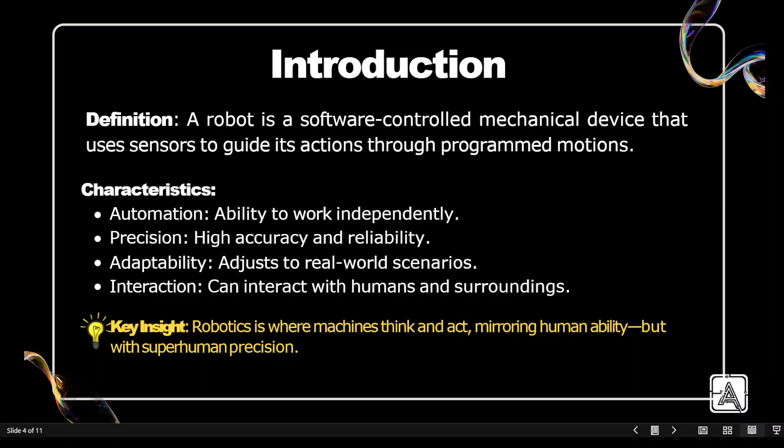Imagine this: a robotic arm on a factory assembling a product with zero errors, zero. A drone delivering medicines to remote areas. These are not dreams, they are applications of robotics showcasing its incredible potential.

Now, let's address a very critical aspect of robotics, the ethics behind it. Picture a world filled with machines smarter than humans, capable of learning and evolving. Without rules, it would be chaos, a scenario ripe for dystopian nightmares.

Recognizing this, Isaac Asimov proposed the laws of robotics, a set of principles designed to ensure harmony between humans and machines. These laws weren't made out of thin air, they arose from a pressing need to guide the behavior of intelligent robots. Let's explore them in detail.

A robot may not harm or injure a human being, or through inaction allow a human being to come to harm. This law ensures that robots prioritize human safety above all.

A robot must obey the orders given to it by human beings, except where such orders would conflict with the first law. This ensures that robots remain subservient but within ethical boundaries.

A robot must protect its own existence as long as such protection does not conflict with the first or the second law.

This enables self preservation while ensuring it doesn't come at the cost of human safety or obedience. These laws form the moral backbone of robotics, ensuring machines remain tools for progress rather than instruments of chaos. Imagine a robot nurse in a hospital prioritizing patient safety while following the doctor's orders. These scenarios highlight how Asimov's laws are not just theoretical, they are a practical necessity for guiding robotics behavior.

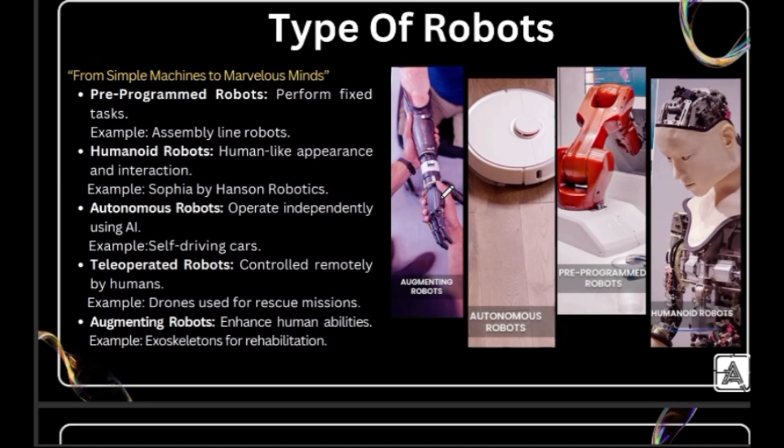Thank you. We have come to the second part of the video. In this part I am going to cover the types of robots, myths and facts related to robot kinematics of robotics, and the conclusion. From the ancient time when we designed mechanical robots to the current time when we have humanoid robots, we have evolved a lot.

Now robots are working as waiters in some restaurants. They are painting the walls. They can do all the small things which earlier only a human could do. In almost every field, we have robots.

Today I'm going to tell you about some main types of robots. First one is pre-programmed robots. Pre-programmed robots are programmed to perform a specific task. They can't perform all tasks, but they are expert in performing a single task repetitively. For example, assembly line robots.

They are designed to do a task repetitively. For example, in a factory, there are some machines to pick something from a place and keep it in another place, like this—it can pick a thing from here and place it somewhere here or there. Some machines are to pack a packet. Some machines are used for manufacturing. Those are known as pre-programmed robots.

Second one is humanoid robots. Humanoid robots, as the name suggests, have human-like appearance and interaction. For example, we all might have watched the movie Robot, in which Chitti is a humanoid robot. Humanoid robots can perform every task we actual humans can.

In real life, we have the example of Sophia. Sophia is the first humanoid robot. She has a human-like appearance and can perform all human tasks.

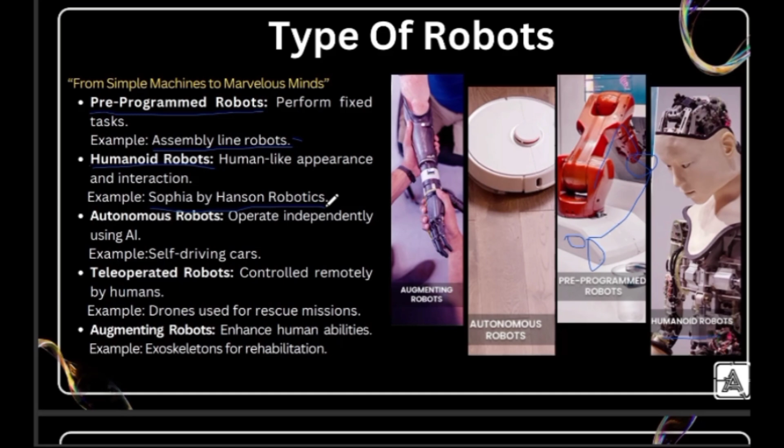Third one is autonomous robots. Autonomous robots are something which work independently without the interruption of a human. We just need to give them a command and they can perform the whole task without any help from us.

For example, a self-driving car or Alexa. We just need to give them a command. They will do the whole work.

Fourth one is teleoperated robots. As the name suggests, we have to operate them. For example, a remote control car or a drone. For a drone, we have to use a remote to move it up, down, or to stop it, to start it—so it is an example of a teleoperated robot.

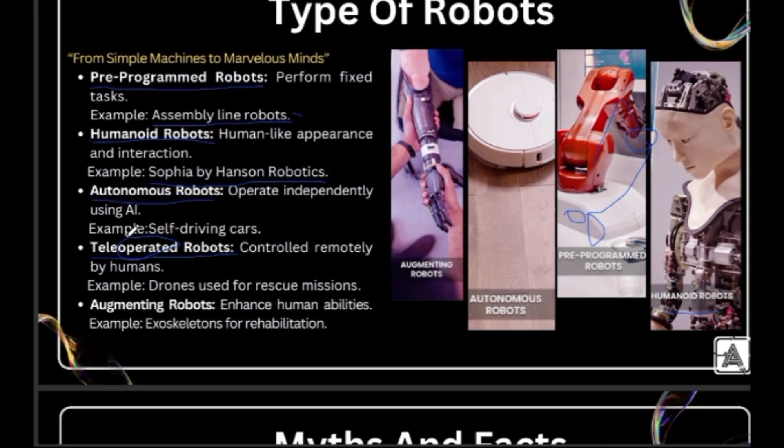Fifth one is augmenting robots. Augmenting robots are something which have the ability to perform a task like a human. For example, an exoskeleton—an exoskeleton is something which has human-like functionality, like an artificial hand or an artificial leg.

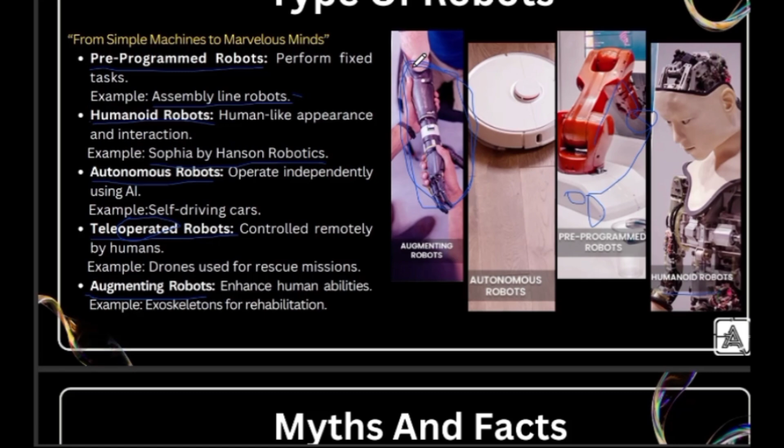Here you can see this hand can work like a human hand, for someone who lost his or her hand or in any case of an incident. So these robots are very helpful for us in performing some tough tasks.

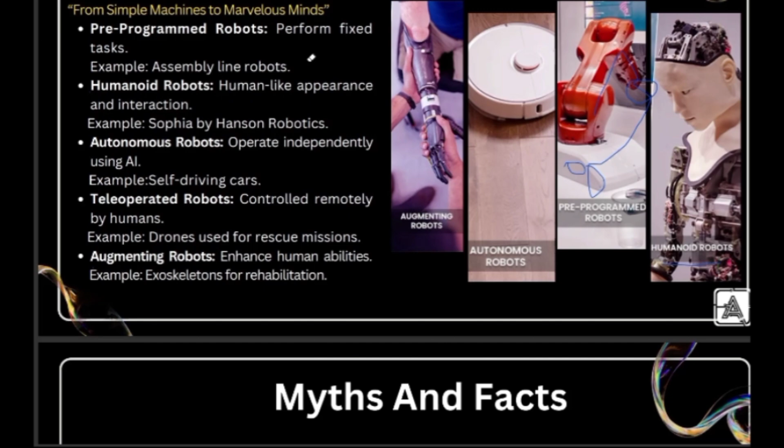And to enhance, to increase our productivity. So now let's move to the next part. In this part, I'm going to address some common misconceptions about robotics and provide factual insights to reshape our understanding.

Let's break it down. First myth: robots are here to eliminate jobs. It's a very common myth nowadays that robots are here to replace humans in almost every field, that they are eating the jobs. The actual fact is robots are here to help us, to create new opportunities by automating repetitive tasks. They can work as a helping hand for humans.

Nowadays, robots are getting replaced by cobots. Cobots are collaborative robots, designed to perform tasks for humans without hurting or harming them. So nowadays, robots are created to help instead of harming.

To support what I'm saying, I have some facts. For example, autonomous robots or autonomous cars still need a lot of improvement. They are far away from replacing a human being. We need robots in almost every field to make our work easy and efficient.

For example, in manufacturing or logistics, they rely on robots to survive. In a big factory, or somewhere we have to create a lot of production, we need robots to work instead of human beings.

Why? Because robots can perform work faster. They don't make mistakes as frequently, and they don't need breaks like a human being.

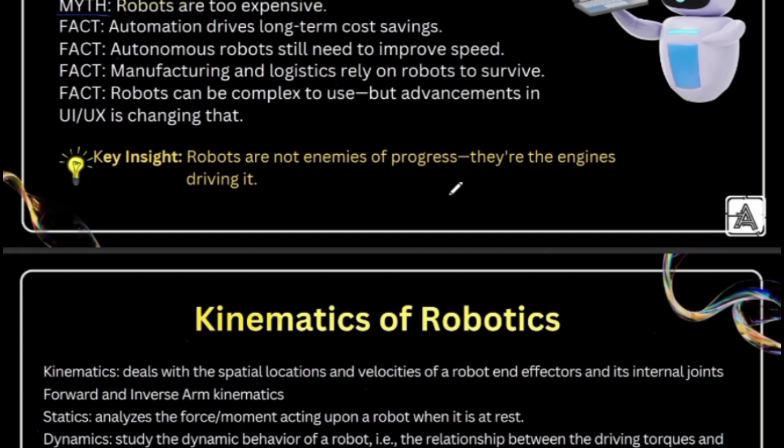Now let's move to the next part. Now we will study the kinematics of robotics. What is kinematics? Basically, kinematics is like giving direction to a robot's body.

Where does its hands or arm need to go? How fast should it move? What angle should its joint bend to reach the target? Without studying the kinematics of a robot, it is not possible to create a robot.

So, in order to create a robot, we should know all the kinematics, like the locations of hand and joints, the velocity of end effectors, and internal joints. If we know all these things, we can easily calculate other things.

For example, forward and inverse arm kinematics. In forward arm kinematics, if we know where the joint is - for example, let's consider this is a hand of a robot and this is a joint - then we can easily calculate that this hand can move here or here. So this is forward arm kinematics.

In inverse arm kinematics, it's just the opposite. If we know the place where we want to reach - for example, here is a glass, and we want to pick this glass - then, on the basis of the place we want to reach, we can calculate where the joint should be. So earlier we know the glass is there and we have to pick it.

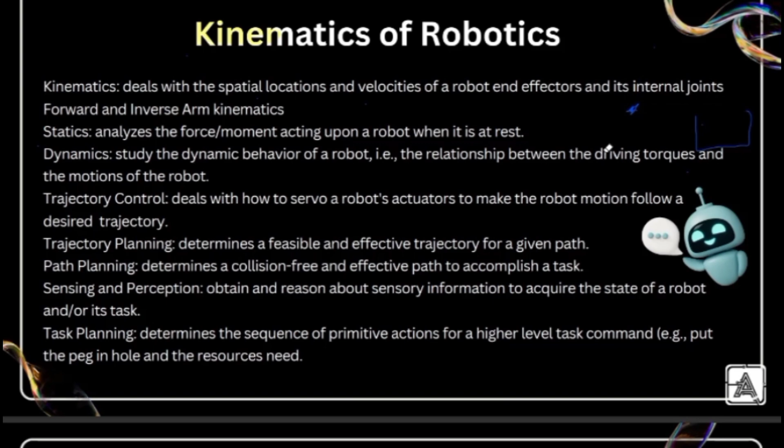So we can make a joint here by calculation and we'll pick this glass. This one is a part of inverse kinematics. These kinematics are very useful while designing the hands and legs of a robot to ensure proper working.

Next one is statics kinematics, which is basically the studying of force acting on a robot when it is at rest. For example, let us consider a robot keeping a box. To ensure that the robot does not drop this box or tip it over, we should ensure that force acting on the box from the side of the robot and force acting due to the weight of the box on the robot are balanced. If all the forces acting on this box and robot are balanced, then the robot can easily keep this box at rest. This is what the study of statics kinematics is.

Now next one is dynamics. In dynamics, we study about the driving force, motion, speed, and energy of a robot while moving. This ensures proper working of the robot in motion.

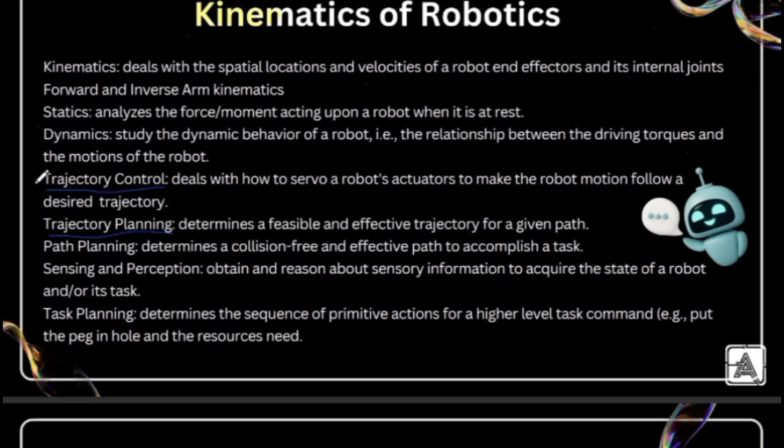Next one is trajectory control. Trajectory control ensures that the robot moves smoothly along a planned path. By trajectory planning, we earlier plan the path in which the robot should move, and trajectory control ensures this movement by using some actuators or motors. For example, if we want a robot to draw a straight line, it should not wobble. To ensure these things, we have to consider trajectory control and trajectory planning beforehand.

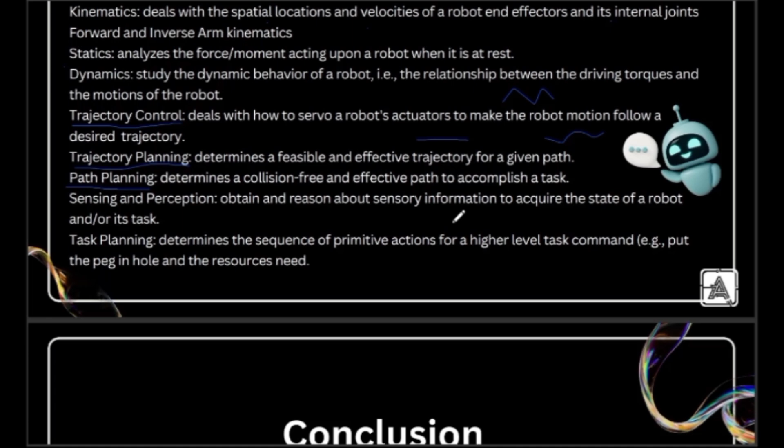Next one is path planning. Path planning is basically determining a collision-free and effective path to accomplish a task. Robots avoid obstacles while moving, but how can a robot sense where a hurdle is in the path, and how can we ensure a collision-free and effective path for a robot?

Here we will use some sensors. Sensing and perception is the process by which a robot can ensure a collision-free and effective path. Earlier, in the components of robotics, we studied about sensors. These sensors will sense the external environment. For example, in a self-driving car, if there is a dog in front of the car, these sensors can sense the presence of that dog, and perception devices take actions accordingly. This ensures a proper path for the car to move and reach the required location.

Then next one is task planning. Task planning is basically determining the actions to accomplish a higher command. Task planning is like creating a to-do list for the robot. It figures out the steps needed to complete a bigger task. For example, if a robot needs to assemble furniture, it should decide the steps like first attaching the legs, then seats, then cover, and so on. So this all comes under task planning.

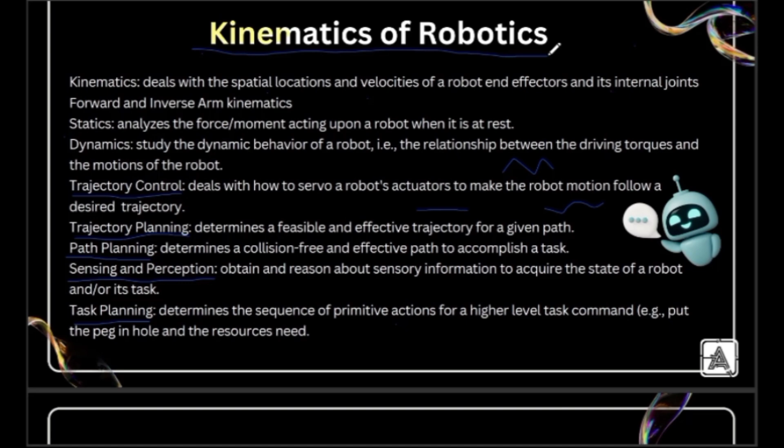Kinematics of robotics is very necessary to know before designing a robot. It will be the basics to design a robot.

Now the conclusion is, where are we headed with robots? Robots have come a long way from simple machines to super smart tools that can help in almost every area of life. They have moved beyond just being industrial tools and are now helping doctors, like in Big Hero 6. They are helping perform surgeries with amazing precision, cleaning our rooms and walls like some robot vacuums, Wall-E, exploring spaces with machines like NASA's Mars rover. We can't go to Mars, but robots are there. They can survive there and give us information about it. This is all possible because of the curiosity of the human mind.

So it's not about whether robots will be part of the future. They already are. The question is, are you ready to build your own bot? Are you curious to be part of this exciting journey? The future of robotics isn't just in the hands of engineers, it's in the hands of everyone with a vision. Let's collaborate, innovate, and build something extraordinary together.